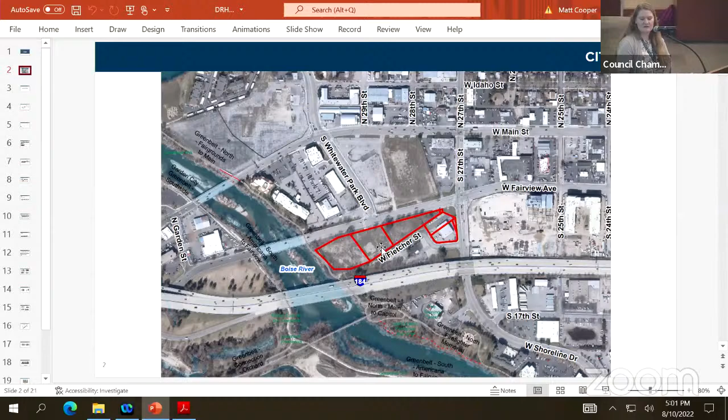At the May 12th, 2021 design review hearing, the committee approved the project with additional requirements to come back at a public work session. So the additional information shall be submitted and a future advertised public work session shall be held to address the following: a finalized traffic impact study and ACHD conditions of approval with detailed alignment for the Fletcher Street extension, and any changes that causes to occur.

Fletcher Street shall be redesigned as a town center local with detached 5-foot sidewalks and planting strips with street trees, and the redesign of the Fletcher Street elevation on the east and west mixed-use buildings. We were looking for additional transparency and the prevention of blank walls.

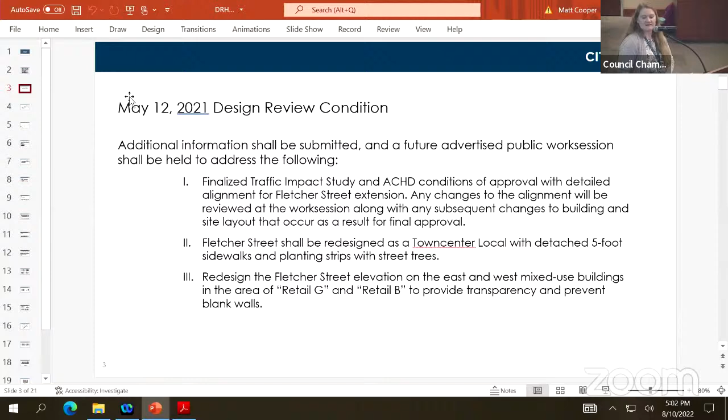So the applicant has submitted some updated drawings. This was the original site plan, with the two multifamily buildings and the office building. And this is the updated site plan.

Things did shift a little bit to accommodate the street alignment. You can go back and forth one more time so you can look at it again. It's pretty similar, but there are some changes there.

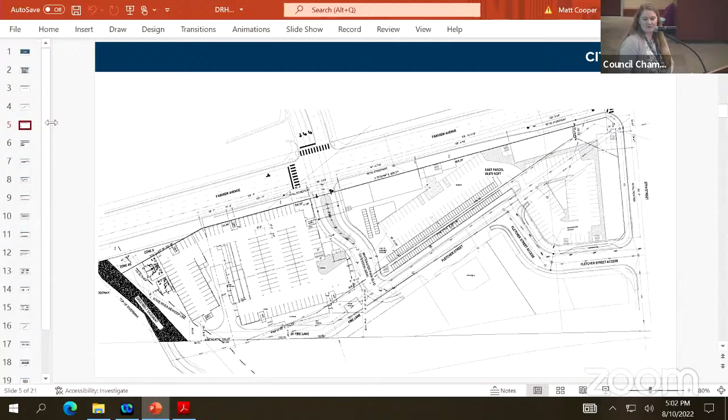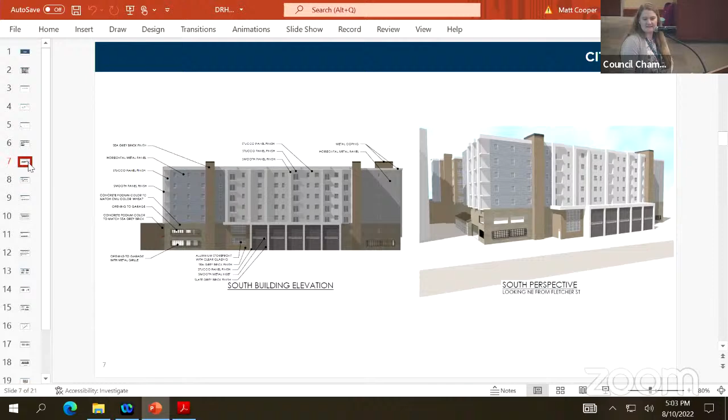These are the areas that we are specifically looking at for those different wall treatments. This was what was originally proposed, which is probably what you saw at that hearing. The applicant has provided some updated design ideas, so you can let the applicant team walk you through what those changes were.

Our suggested motion is to approve the work session drawings dated received July 5th, 2022, and the drawings, discussion, and findings contained in the work session memo for the hearing dated August 10th, 2022, with some additional conditions. The first is that the streetscape planters and planting strips shall be a minimum of 8 feet in width unless the applicant provides written approval from ACHD allowing them to be planted in the narrower proposed 6-foot width.

The ACHD approval did note that they needed the 8 feet, so in order to get those trees in there, we'd want to see something from ACHD that says they'll accept the 6 feet. The second condition is if the unopened Fletcher Street right-of-way is vacated as proposed, then we would want to coordinate with Boise Parks and the Planning Division to provide the pathway within a permanent public easement. That pathway access to the greenbelt exists in the right-of-way currently, so if that's vacated, we would want to put that in a public easement.

And with that, I will turn it over to the applicant. Great, thank you. If you would please state your name and address for the record.

Thank you, Mr. Chairman. My name is Jay Gibbons. I'm with South Beck and Baird here in Boise, Idaho. We led this project through the entitlement process, and so...

In compliance with the condition that the city put on us at our original DR hearing, we had this work session so that we could provide some updated information and what have you. So since a year ago, we have an architect out of Seattle, different than our entitlement architect. He's been working on construction drawings. We are working on the west phase, the apartment building and the office.

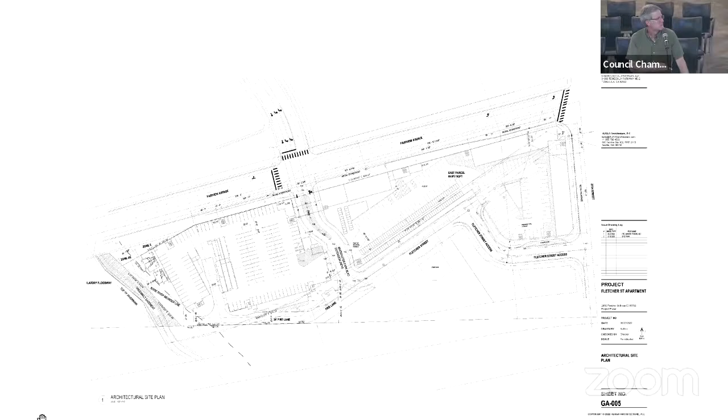There we go. I have a separated sidewalk, and it's a 6-foot planter, in compliance with ACHD's requirements. It'll have rigid root barrier panels so that we can accomplish the trees in that slightly narrower section there in the parkway.

Also, part of ACHD's requirement was, and part of the city's overall Fairview plan—if you're familiar with the St. Luke's being built on Fairview and 27th across from us—the bioswale treatment along Fairview is what we're matching on our Fairview frontage to the west, to the bridge there.

ACHD now wants those 8 feet wide instead of 7, which was in the plan. So we'll be widening that to 8. That's not a problem, because they want trees in it too. It's also a bioswale, and it needs to treat a lot of stormwater coming off of Fairview.

So we've gone through the whole process with ACHD. They've approved with conditions, and we're working on that so we can get the site plan all worked out. Architects are working on the buildings as well.

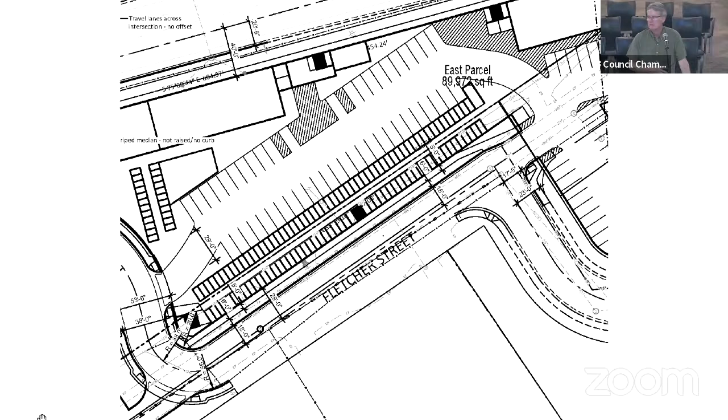I believe my architects are on here in case you have architectural questions. I think they are—Grant Siemens or Robert Brown, are they online? Do you know? Okay, good. They're here as a resource.

So we've been working with HURAA Architecture out of Seattle. The basic building footprint is the same.

They've updated the facades as far as there's more relief, especially on the Fletcher side. We needed to do something where the little 2-story kick-out there—that is actually storage units for residents in apartments.

It's 2-story, and that'll be similar on both buildings. The first 2 stories, of course, are parking garage on podium, and then there's 5 stories of apartments above that. These storage units are for the residents, and they're attached in the parking garage area itself or just off of it.

They've upgraded that with some vertical elements that break up that expanse. There's also a row of horizontal windows at the top of the first story. They can't make them so transparent—they're just looking into somebody's storage unit. So we think we've broken that up better.

The wall of the apartments above—you can see similar vertical elements that actually kick out from the building face, in that they're going to carry mechanical connections to the apartments that way as well.

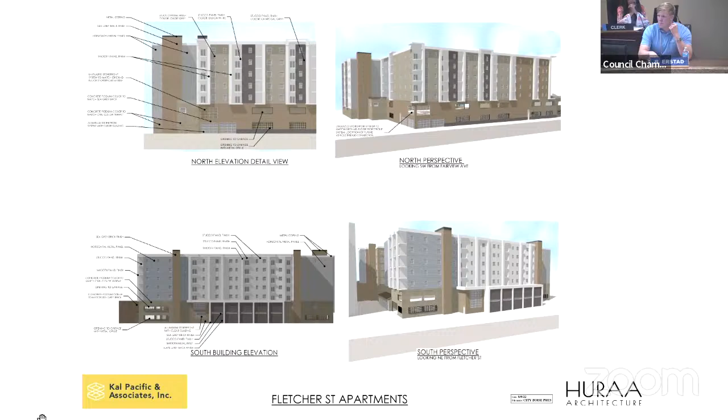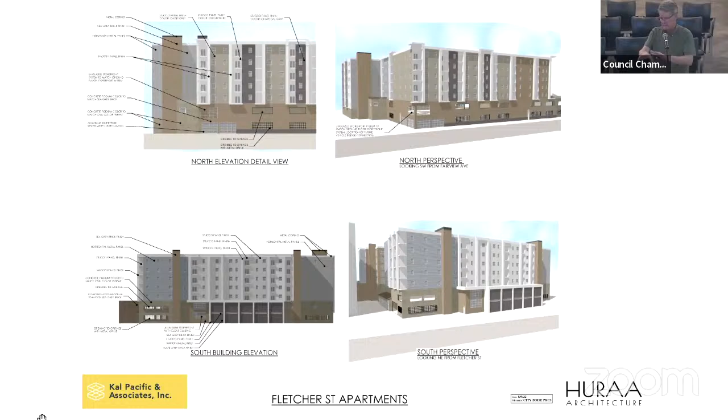Maybe do we have any images of the whole thing together, both phases? With this particular style, no, because this architect has not started work on just phase 2 of the building. If we go back to Caitlin's image in her presentation that showed what was originally form and function, is the same. The materials, colors, and granted, every printer is slightly different than others.

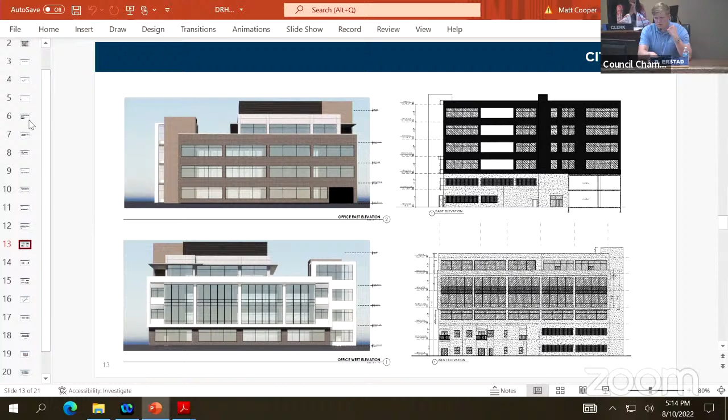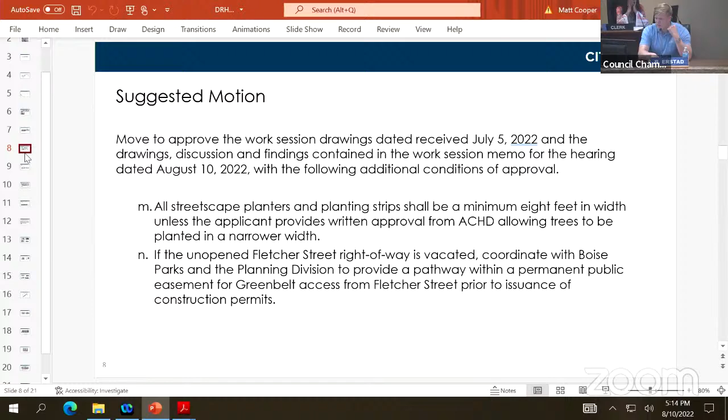Caitlin, can you go to the Fairview perspective? That's Fletcher. So, top one is Fairview. Okay.

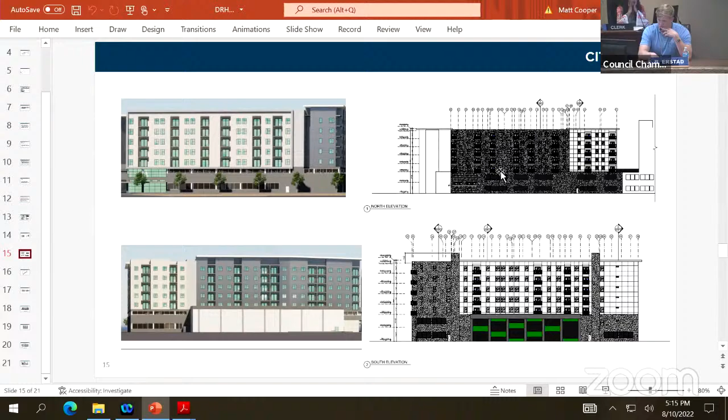So what's different, if you look on the upper left, what's different from then to now, at least on the parking garage, it looks like that is one solid opening, whereas now we have several openings that had a metal grate frame system over those openings. Previously, we still have a metal grate opening on the new ones, but that wall is not as open as you can see it was original.

And then above, it was basically what broke that up was the patios and the windows. It's all one flat except for that window element, the verticalness of it lined up. And if you look at the new one, we really have separate colors and columns, and there are vertical elements in between the windows and the patios, and it's actually created more interest.

Caitlin, would you go back to the new images?

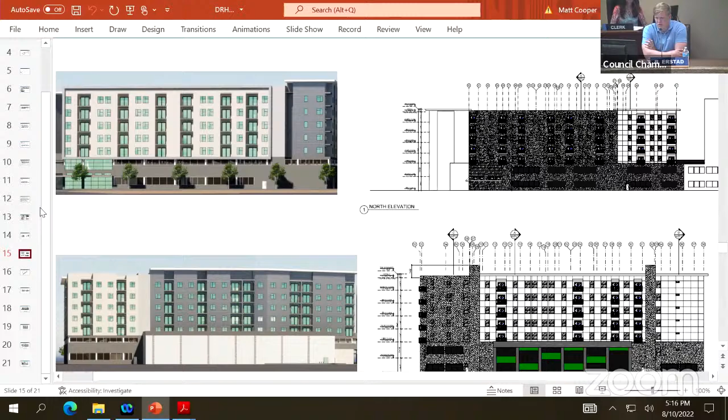So were the changes spurred by comments in the last design review, in the design review approval, or have you submitted a design review modification for all of these updates? We have not submitted a modification. And I don't know that there was really much discussion on, well, this is really, the original was really bland, per se.

It's another architect's interpretation, and knowing that the city wanted more interest on the facade, so that's what they tried to provide.

I think where I'm going with this is when we've got a pretty marked departure from what was originally approved, is there a mechanism in place for us to reapprove this essentially? Because this doesn't look like the building that was originally submitted. And I'm not saying one way or the other whether that's good or bad. It's just this is a different building. I mean, massing wise, yeah, it's the same, but this is a different building.

So are we talking about whether or not we approve of this building tonight, or is this strictly the realignment of the road and the sizing of some landscape planters? Well, yeah, I guess that is a good question, and I'm not sure staff if you want to comment on that, but go ahead, Keelan.

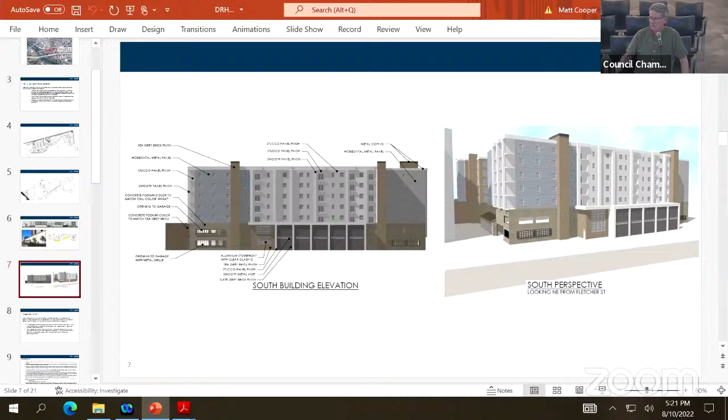Yeah, and I think we're all pretty sympathetic to that. And as far as what we're capable of doing within this format, maybe it's one more work session and that counts. If we can get you to a level of comfort with updates to the building and get the buildings where you want to see them, regardless of what they're hoped to be, then I'm all for that. I have no issue with another workshop with you all at all.

Mr. Chairman? Yep. I would think that Ryan's on the right path there, and that if we had another work session, as the applicant has indicated this evening, there were numerous things that you described as what has changed, although it's not necessarily something that we can look at and say this is what it looked like before and this is what it looks like now. Should have exhibits for that.

Yeah, it would be nice to have a side by side - this is what it was, this is what we have now, and just a compendium of the things that have changed. I'd be comfortable with that, and we could move ahead with the roadway types of things this evening. I don't have any problem with that right now.

Yeah, Mr. Chair? Yep. I would second that. I would say that if we can lock in site plan, particularly as it relates to ACHD, then let's go ahead and remove variables wherever possible.

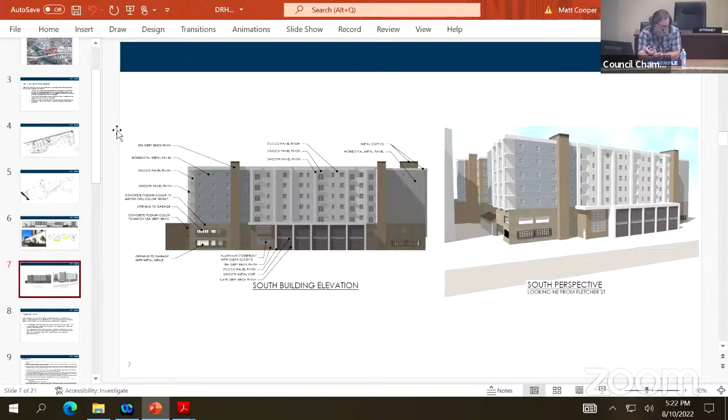Exactly. Mr. Chair, it looks like, based on what we asked them to come back with for the work session, they've addressed substantially the 1, 2, and 3 - there's definitely more transparency there. But I agree that especially with the building going from 4 to 5 stories, and some of the other stuff you talked about, I think it's on the right path. So I guess I'm in agreement with the other parts of the conversation here.

Mr. Chairman? Yes. I do have one question for you, sir. You mentioned you have phase 1 and phase 2. Is it your intent that you're going to build phase 1 and then phase 2 sits until you get a comfort level that you can have the market to build it? Or is it just a timing thing that you're going to build phase 1 and move right into phase 2?

It's a timing thing because they're big buildings. And you can't hold off on phase 2 very long because the parking works together and crosses over the top of Whitewater. So it's important that they go side by side, but from a sequencing standpoint, you've got the office, so 2 buildings there, the roadway improvements and everything. Then phase 2 is - everything's in place except the building, and then they can go right into the building from there.

Will we, if we proceed down the path that's been suggested here, be able to see what the phase 2 building is - the one we haven't seen this evening? As I mentioned to staff before the hearing started, I understand that we're only working on phase 1 west of Whitewater at current. And I said it wouldn't surprise me.

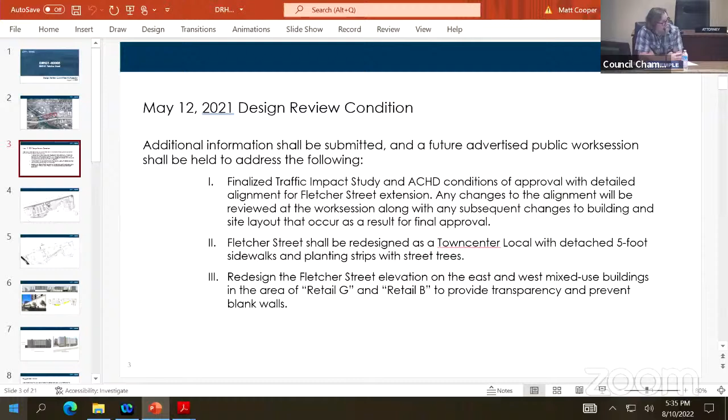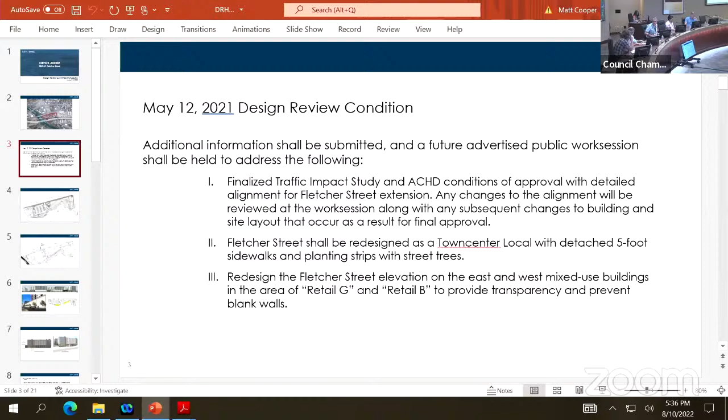Okay, so moved. Any other discussion on the motion? I would second the motion. Okay. Motion, second, discussion. Hearing none, can you please call the roll? Simple, aye. Kabala, aye. Marsh, aye. Aguilar, aye. Erstad, aye. All in favor, motion carries.

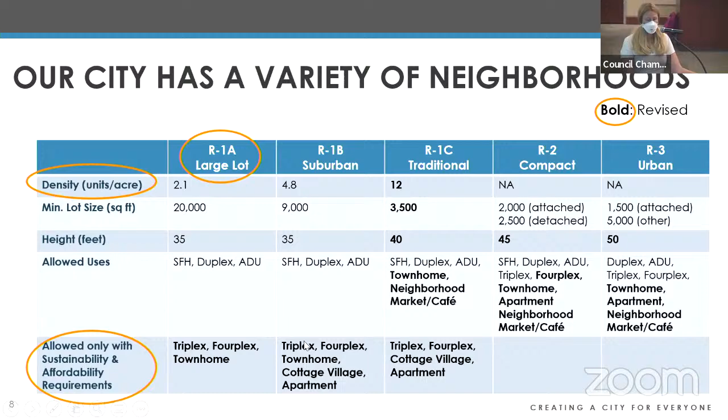So I'm going to kick it over to Lena Walker, and she's going to walk you through some of those changes in regard to zoning districts.

Good evening. The first part of this is to walk the committee through getting back to one of those pillars of our framework that we've come to: directing development where we have planned public investment. Something we really heard a lot in our community outreach was that we need to support the areas where we've already invested a significant amount of public resources, and find a way to incorporate the benefits we get from land use and development to support that investment as well.

One of the ways that we're proposing to do this is establishing new mixed use zones that have really strong urban design requirements in these areas. You can see on this map the general overview of what those areas would be.

So you have the downtown planning area, identified transit-oriented development stations along State Street, our best-in-class transit routes, which would be State Street, Vista, and Fairview, as well as our pathway corridors that have been pretty significantly built out at this point. So the Greenbelt and then also the Federal Way multi-use path.

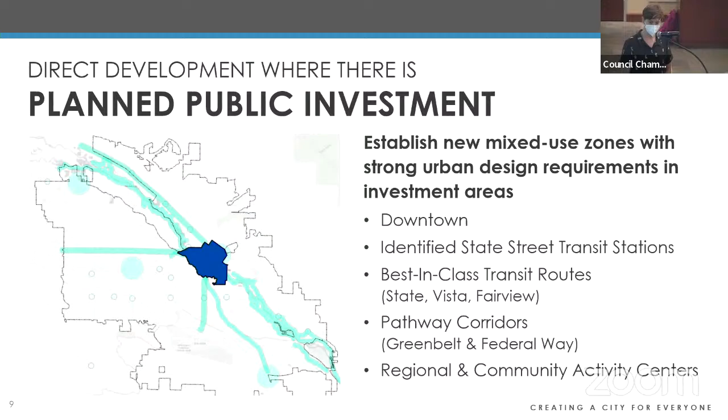As well as our regional and community activity centers from Blueprint Boise. So kind of starting off with downtown on that list, we're really using the downtown planning area as our framework for how we think about directing some of our most intense mixed use development.

So we have a new mixed use zone called MX5 or mixed use downtown. There's no density calculation, and the conversion on the map here would be all properties that would be C2, C3, C4, or RO within that downtown planning area would be automatically converted to that MX5.

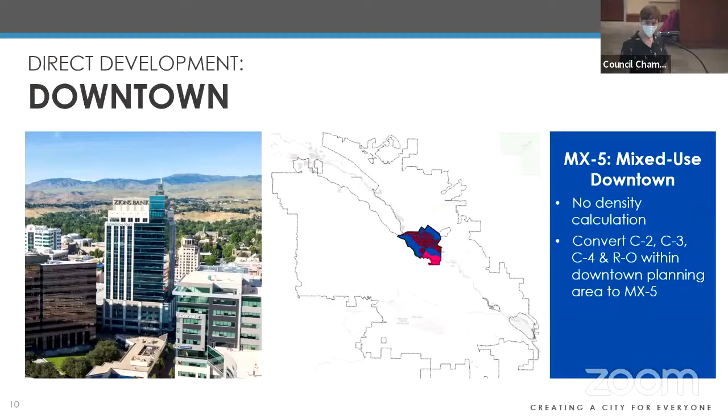Next, we have our State Street transit stations. So there's 4 nodes that are identified from the State Street transit plan. And this would be a mixed use transit-oriented development. So again, no density calculation.

There would be a 60-foot height limit, but potential to waive that if there's affordable housing incorporated, and no minimum setbacks, but also requirements for wide sidewalks. So trying to really achieve that urban and transit supportive built form along the areas of State Street where we really want to see it.

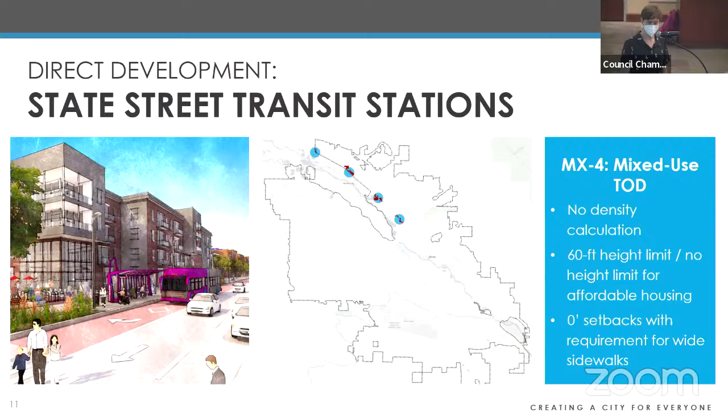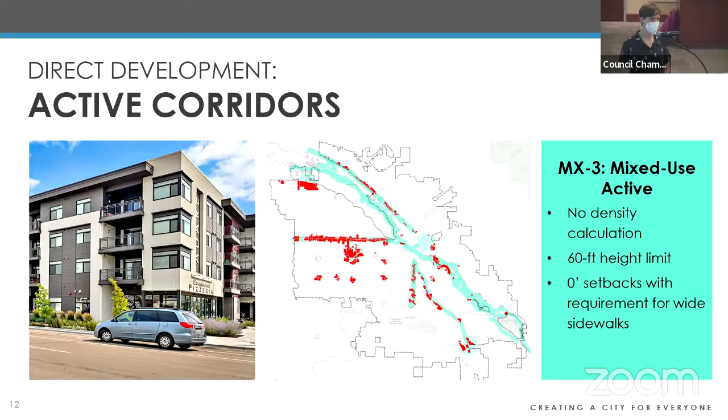Building off of that, we have MX3 or mixed use active. And so again, this is going to be State Street, Fairview, Vista, Greenbelt, Federal Way, and then regional and community activity centers. Again, no density calculation there and a 60-foot height limit and no minimum setback, but again, requirements for wide sidewalks, urban tree canopy, and other things to really support multimodal transportation throughout our city.

A key component of this along State, Fairview, and Vista is to also really recognize that we need to have some sort of coherent transition from these corridors into the interior of the residential neighborhoods.

And so along with this, there's a proposal to convert residential properties that are R1A, R1B, or R1C. If they're within an 1/8 mile of those identified corridors, they would be converted to R2.

So really trying to address, not only do we have these sort of neighborhood transition standards for how the buildings themselves may actually step down, but trying to open up some additional potential for those properties that might be right next to commercial properties that are converting to MX3 and how we can create more coherence along those corridors.

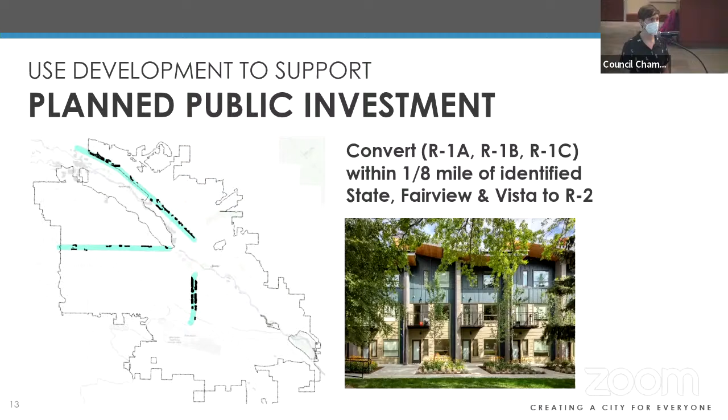So when we think about directing development where we have planned public investment, one of the things that is certainly a goal for the city, and we've heard strong feedback from the community, is wanting to have other ways for people to get around than just driving their car. And another component of that is places that people can actually walk to within their neighborhood.

So the MX1 aims to address those needs and really create great spaces that are accessible by foot from residential neighborhoods.

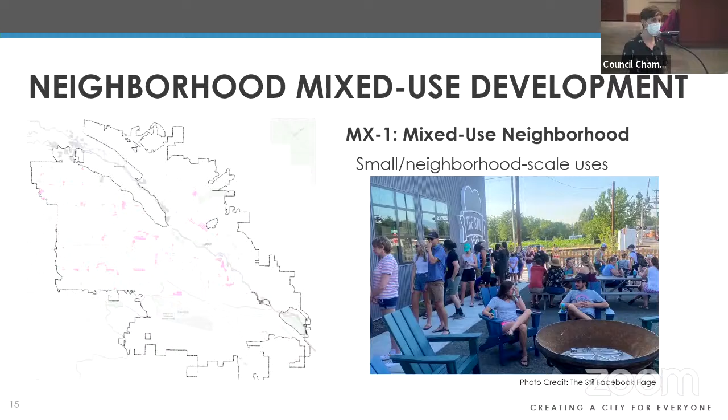The other side of this, so that's the rundown of what the different kinds of zones are. And then we also heard from our community that we really need to have strategies for how we're going to provide affordable and sustainable development throughout the city. We have a couple different approaches that we're proposing to that.

The first one here, previously, when we had done our Module 2 outreach, the recommendation was to allow for up to a 4-plex throughout all residential zones in the city with no additional requirements. And what we're proposing here for R1A, R1B, and R1C is that you could build up to a triplex or a 4-plex, but it comes with some specific requirements.

And those would be that either one of 3 or 2 of 4 of those units would need to be affordable to households earning 80% AMI for a rental product or 120% AMI for an ownership product. And that requirement would be in place for 50 years.

And in addition to that, there would be requirements about incorporating design and infrastructure elements that support our various goals for clean energy and wise use of our water.

We also have a proposal for a strategic infill incentive. This is really getting at a surgical approach to develop missing middle or small-scale density housing in areas that are well set up to accommodate and support it, on either vacant or underutilized parcels within existing developed areas. I can break that down more for you.

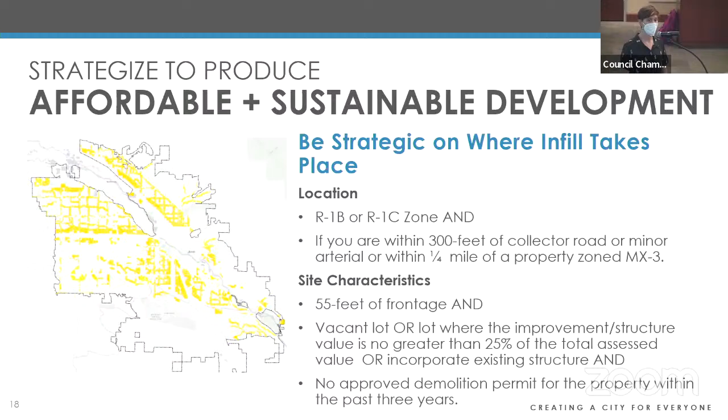This preserves naturally occurring affordable housing or more traditional architecture. There would also be a requirement that you could not have an approved demolition permit for the property within the past 3 years. We want to protect against creating a mechanism where folks just tear down housing to build something new, while still encouraging the possibility for folks to increase density within their lot.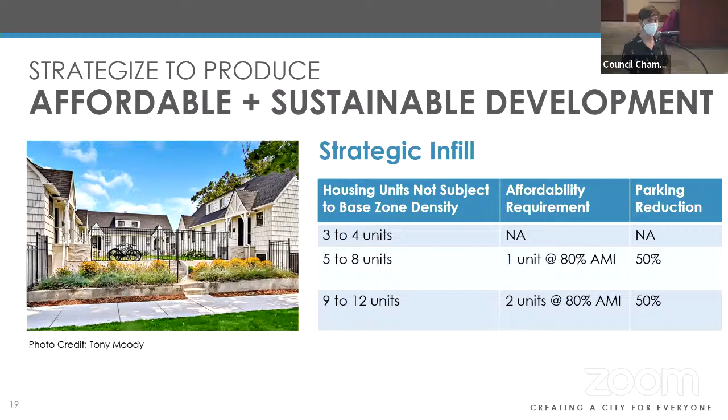So how this would break down: if you wanted to do 3 to 4 units, there's no affordability requirement. You could do all the way up to 12 units. If you were doing 5 to 8, one of those would need to be dedicated affordable at 80% AMI, and for 9 to 12, 2 of those units would need to be dedicated affordable at 80% AMI. For those affordable units, you could potentially be eligible for a parking reduction to support that development.

These are just some different examples you might recognize from around town. There's a lot of different things you could do with this infill incentive—cottage courts, duplexes, triplexes, townhomes. There's a variety of options we're looking at, and it's really that flexibility and creativity that we want to support with this incentive.

In addition, in the MX3 and MX4—again, those active corridors or TOD nodes—we have an incentive that would allow you to reduce the minimum parking requirements and also waive height limits if 25% of all units are affordable to households earning 60% AMI or below for 50 years, while incorporating sustainability criteria such as energy efficiency in the design of the building or water-saving implementations.

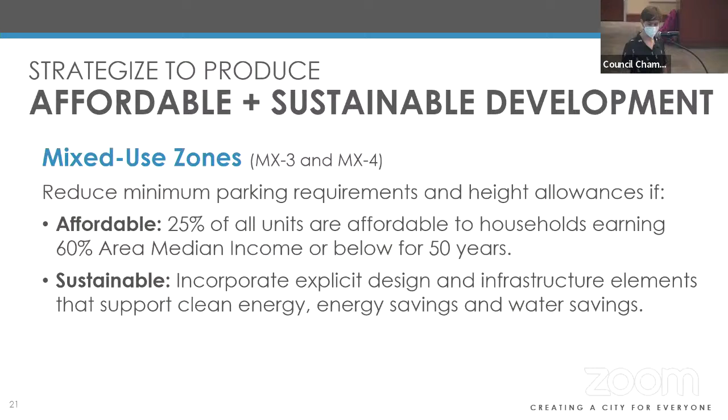And then finally, our last piece of this: we want to direct development where we have planned public investment, but we also want to be careful and recognize that we don't want to just develop everywhere—we don't want to sprawl everywhere. So one of the tools that can help with that is proposing to create a new zone.

Currently we have the A1 and A2 zones. This would create Open Land 1, 2, and 3. The O3 zone would be a managed land designation with specific restrictions, recognizing there are limits on the amount of development we'd want in those areas. This could potentially be a tool to help us as we revise our annexation policies, so that as land comes in around the edges of our city, we have a zone that speaks to how we envision its use, rather than having ambiguity around that.

We also have our overlays of the Boise River system and the wildland urban interface. These overlays don't preclude development, but they do require incorporating specific design criteria around building materials, defensible space, and other rules that help allow for a more peaceful interface between our human development and the flora and fauna that we treasure and see as an integral part of our city.

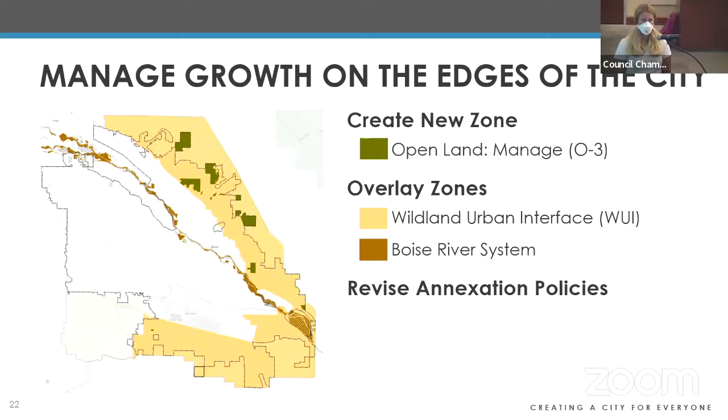Agreed. Thank you. Anything else? Thank you so much. Appreciate it.

Thank you so much. And if you want to stay involved in the process, we'll be going back out to the community beginning in October, and then we'll visit with you as soon as we've had an opportunity to talk to the community about Module 3, so that you're apprised of where we're headed with that. Great, thank you.

Did I just close yours out?

All right, Mr. Chairman, we're just a couple minutes overdue here, but we can go ahead and get started with the public hearing. Just 3 items on the agenda tonight. A deferral, number 1, and then I believe the other 2 we will propose for consent. We'll see if we have any public comment and if the applicant is in agreement with both of those, but we would propose them for consent. Great, thanks, Josh. Questions on those?